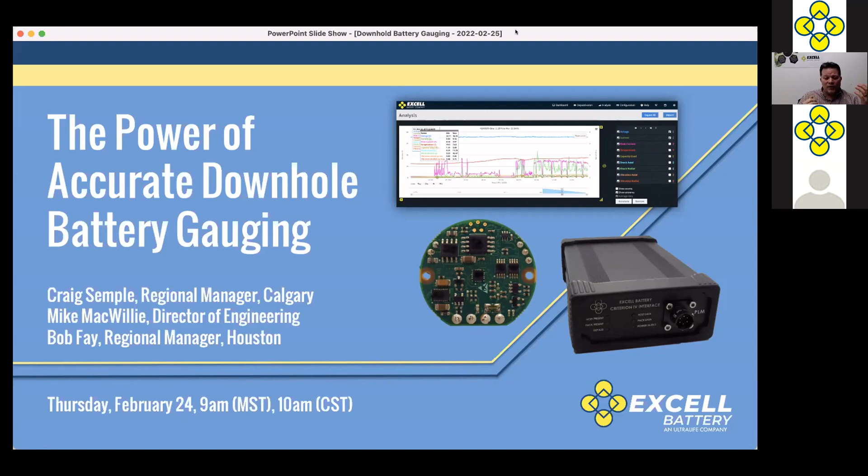Today, we'll take a look through Excell's Criterion gauging system. I will speak briefly on the history and advancements over the years, and Mike will take us through the technical specifications. Bob's going to do a nice demo of it all in action, and then we'll open up the floor to some of the Q&A that you guys have been posting throughout this conversation. So let's take a look at the next slide here.

So let's take a walk through the past, shall we? In the days of yore, when the world was young, it became ever apparent that there was a real need to answer what seemed a very simple question, really. What do I have left in my battery? Can I get another run? Well, this very simple question came with the reality that we were operating in, what you all know are some of the harshest environments out there.

Batteries would come back from the field with their badge of honor, the time-tested yellow and red paint marker scribbles on the side of the pack, 97 hours. And that paint was the capacity reporting of the day. So to take hold and wrestle this question to the ground, it was at this time that the Excell Group first introduced something we called our battery gauge, the BG. And the question was answered. It worked. It was simple to implement and operate, and life was good.

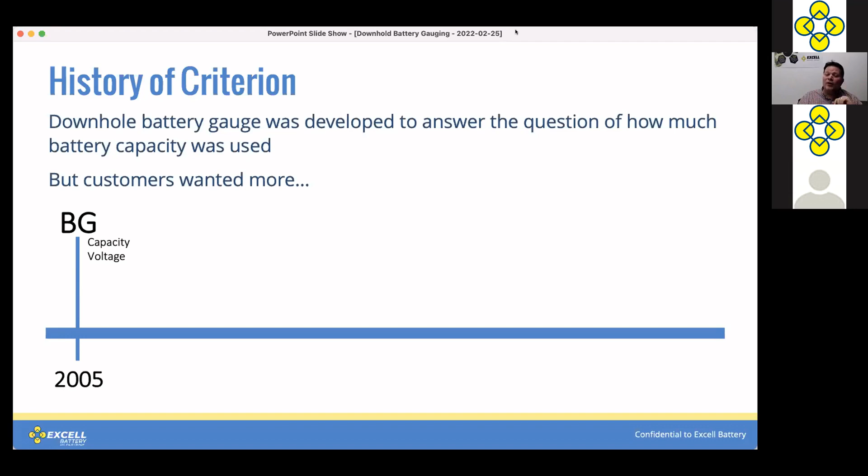A few years went by, and this wise person once said, if it ain't broke, it doesn't have enough features. And thus we undertook the design of the battery gauge 2. And not only did our engineers manage not to break it, they brought to you a whole suite of new features that the industry, that yourself were keen to have live within that battery: logging, shock, vibration, current, temperature, and a software interface to chart it all with.

It was great. But it was only a couple of years, suspiciously, around the time my friend Mike MacWillie came on board with Excell, that the thought came about that there were newer sensors, more powerful microcontrollers and memory that could withstand our harsh environments. We designed a new battery gauge, and this one was at a whole new level. With the need for your criteria to achieve this new bar for accuracy, the Criterion was born.

Accelerometers in all axes were implemented. The ability to communicate with the tool in real time was added. The software package was re-envisioned. The whole system was pretty special. On this platform, we have carried on to where we find ourselves today with the Criterion 4. Just a suite of features that were added in based on a lot of feedback and customer requirements.

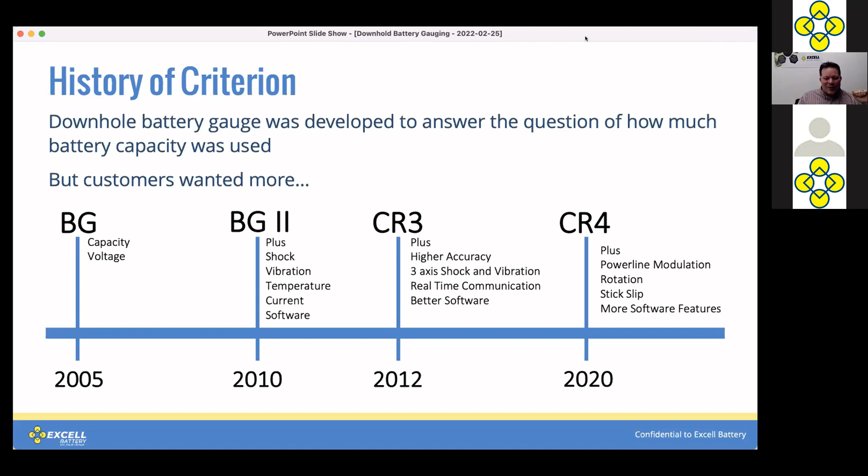Thanks, Craig. Hi, I'm Mike, Director of Engineering, and I'm just going to go through the technical specs fairly quickly. That there is a picture of the CR4 gauge, and it's able to sense, log, and record time of day with a real-time clock, voltage with the sensor. We have peak and average current, temperature, shock, vibration, rotation, and stick slip. And then from our time of day and current measurements, we calculate the capacity used.

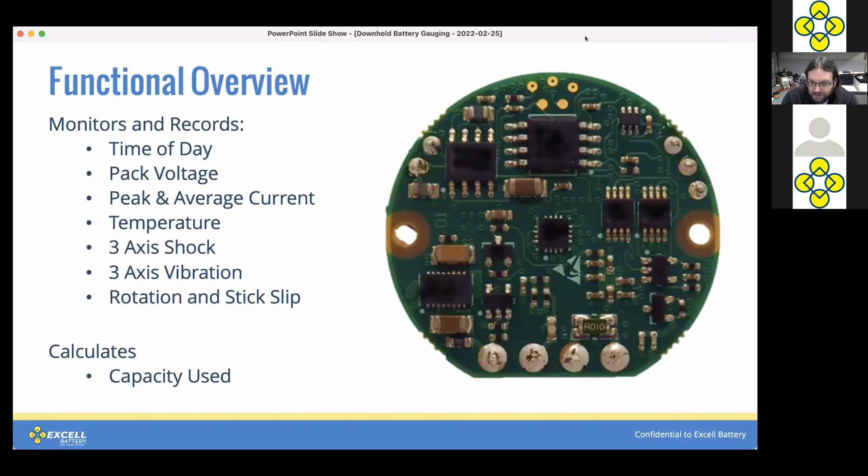The interface to the pack is fairly simple. The gauge sits between the cells and the output connector, and we have two communication interfaces. The CAN bus, which is the fastest, most robust interface, and then we have PLM if pins aren't available for CAN.

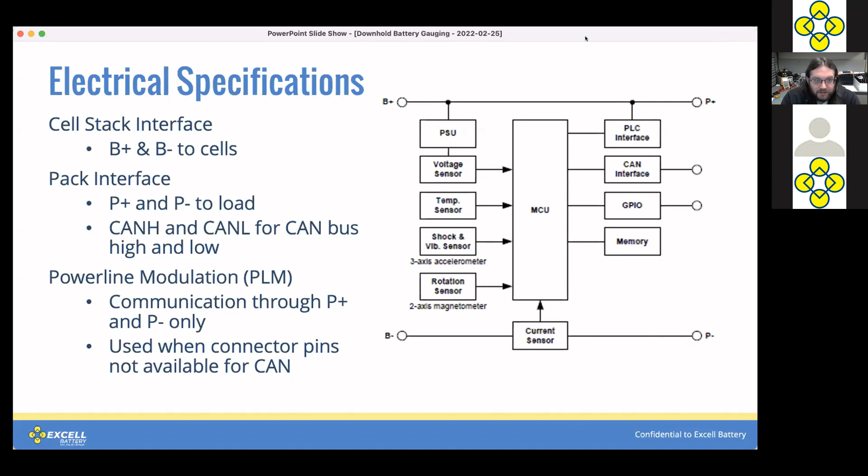Can we go to the next slide, please? Thanks. Power management. This has got a fair bit of effort to try and minimize the effect of the gauge on usable capacity of the battery.

There are really three states of interest. There's deep sleep, which is our lowest current state for extended storage. As an example, with a typical pack, max current draw is about 200 microamps, which means for a standard 29 amp hour pack, it would survive somewhere around 16 years.

Sleep is logging enabled, but the gauge is inactive. Max current draw 1 milliamp, and apart from log entries of went to sleep and woke up, there's nothing written to memory there. And then active. We transition from sleep to active based on current being drawn from the gauge. That threshold is configurable, but once that's exceeded, you're in the active state.

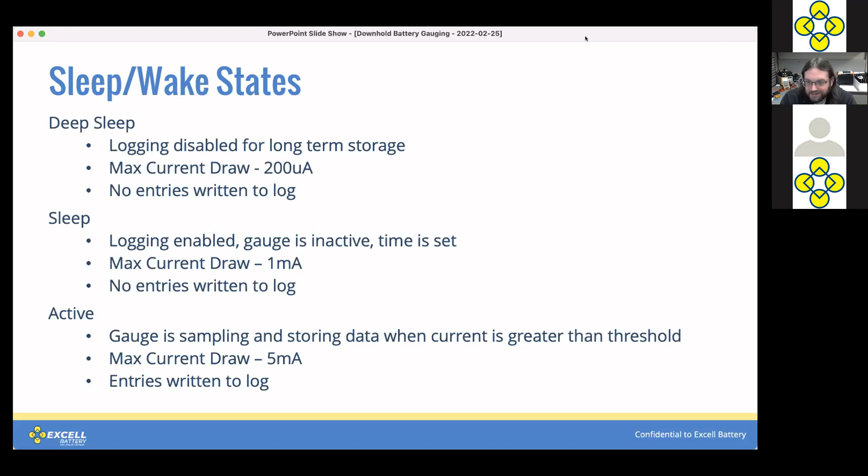Max current draw is 5 milliamps. It's typically a little bit lower than that, but that is with all sensors running and writing log data at the highest rate possible. And again, just effect on battery capacity. So deep sleep, 16 years, sleep 3.5. And in a typical 300-hour run, you're using at most 5% of battery capacity.

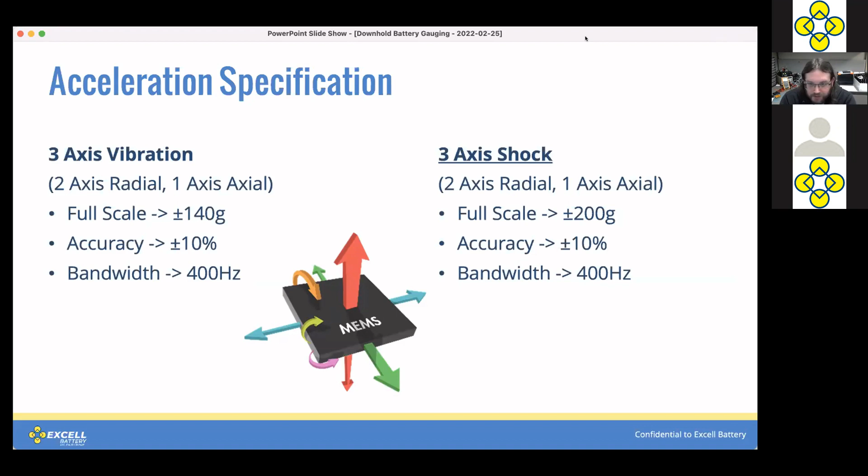Acceleration is done with a 3-axis accelerometer. Two of them, X and Y, are used for radial, one for axial, and full-scale resolution 200G, RMS 140 for vibration. Bandwidth up to 400 hertz on both, and plus or minus about 10%.

This is measured at a fairly high sample rate, 800 samples a second, and vibration, for radial, gets summed, filtered, and the max of the log rate is written to the log. For Z, it is just RMS filtered and the maximum during that log period written to memory.

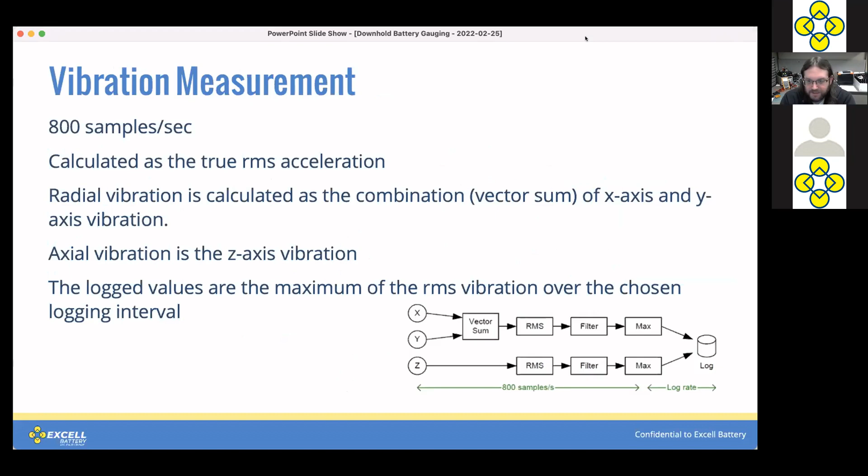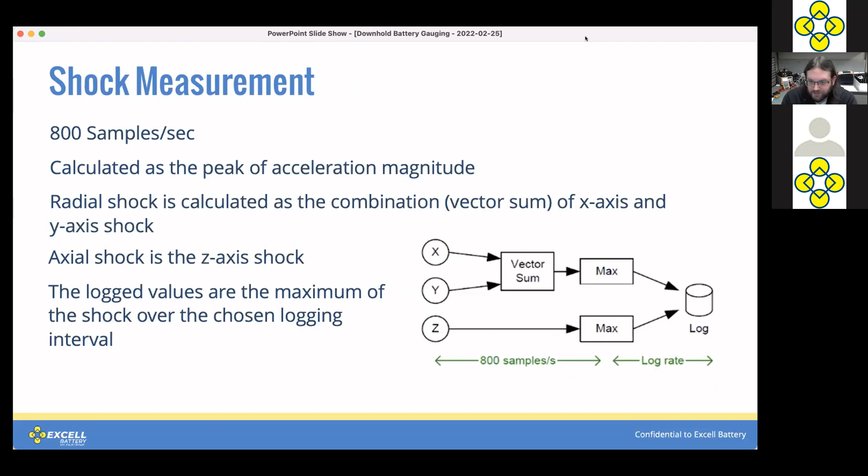Shock also uses the same accelerometer data, but gets a different filtering mechanism. So shock is really the peak in that period logged to memory. So at that 800 samples a second, the highest acceleration value recorded is the shock.

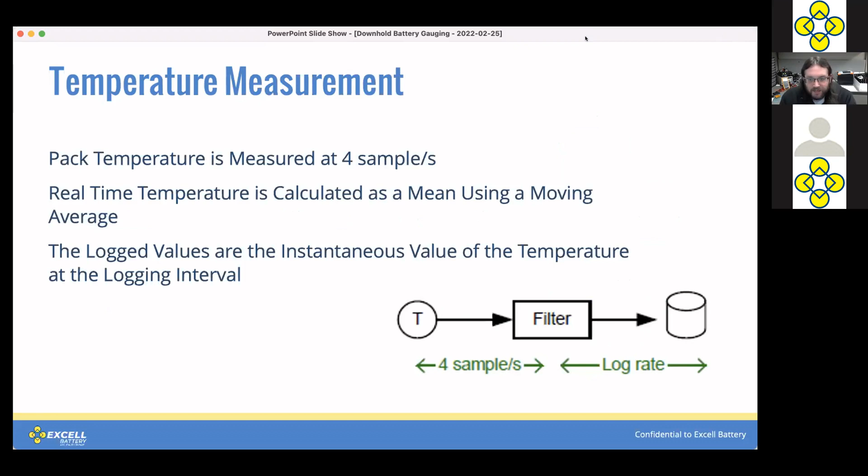Temperature. We have a temperature sensor on the board, and that is able to measure from -40 to 165, plus or minus about 2 degrees during the typical operating range. Temperature is measured a little more slowly, but still more than fast enough, 4 samples a second, and there's a moving average filter on that, which then gets logged to memory at the configured interval.

Voltage range, good for 5 to 65 volts, and we can measure 16 millivolts of resolution, plus or minus 1% accuracy. And again, 4 samples a second, it gets filtered with the same moving average filter as temperature and logged to memory at the rate we choose.

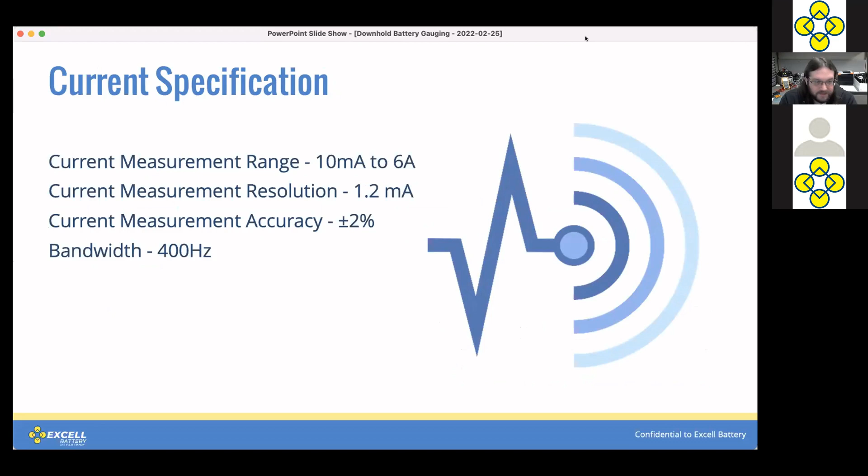Current, able to measure from 10 milliamps all the way up to 6 amps with 1.2 milliamp resolution, 2% accuracy, and that same 400 hertz bandwidth as the accelerometers. Current gets a little more signal processing. So that one measurement gets used to generate 3 data points.

The state of charge calculation, which is that 400 hertz measurement integrated over time. Then it gets averaged for the current that is logged just as current, and a peak detector of that period generates the peak current, which gets logged.

Rotation is done with a magnetometer, and we can measure anywhere from 3 all the way up to 500 RPM, plus or minus 5%. This is also sampled at quite a high rate, 1 kilohertz, and the rotation is filtered, integrated over time, and logged as RPM.

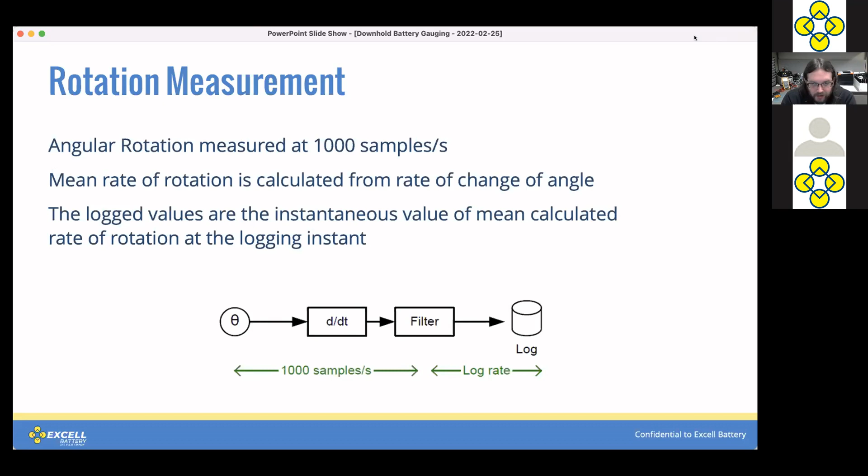Stick slip uses that same rotation data, and 3 paths on this one: min, max, average. And stick slip is the ratio of max minus min to average. So that's reported as a percentage. And finally, all of that gets stored in memory. We have 8 megs, which is good for about 4 million data points.

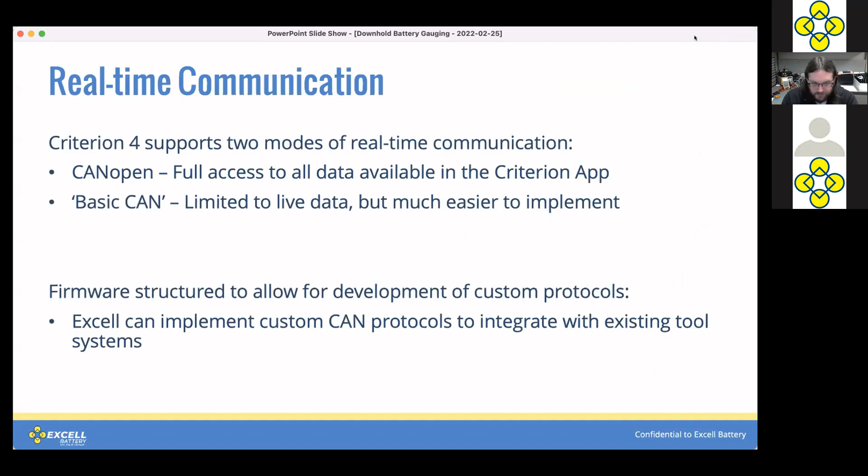Along with CR3, CR4 kind of expanded on the real-time communication options. We now have 2. There's CANopen, which is full access to everything that is available in the app. And then there's a simplified basic CAN protocol, which only gives you a subset of the live data, but it's really easy to implement. On top of that, our firmware is also structured in a way that lets us plug in custom protocols for whatever's needed.

Basic CAN, like I said, it's pretty simple. There are a total of 3 messages. They're sent out on fixed intervals. A GPIO pin on the gauge is used to switch between CANopen and basic CAN. So when most people use this, they just send it out a pin in the connector and tie it low in the harness when it's plugged into the tool.

IDs are configurable, so you can have up to 8 on the same CAN bus. You get 3 messages. Those 3 messages contain vibration, voltage, current, temperature, and capacity used on different intervals. But because the protocol is so simple, it doesn't support configuring the gauge or downloading of the log data. We do that in the app before integrating the battery into the tool.

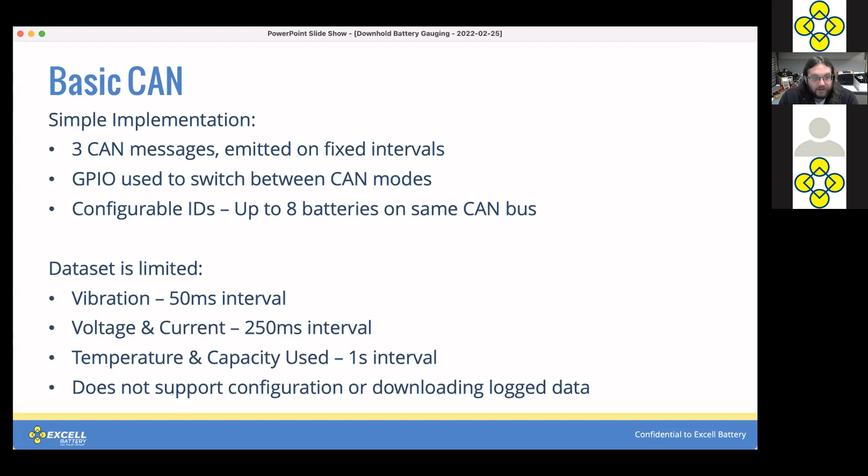And CANopen. CANopen is the same protocol that the app uses to communicate with the gauge. You have access to the full data set, everything including data download, configuration, real-time data, and all of the data on the dashboard of the app can be enabled as PDOs on demand. If that's something that interests you, just reach out and we can set you up with those details.

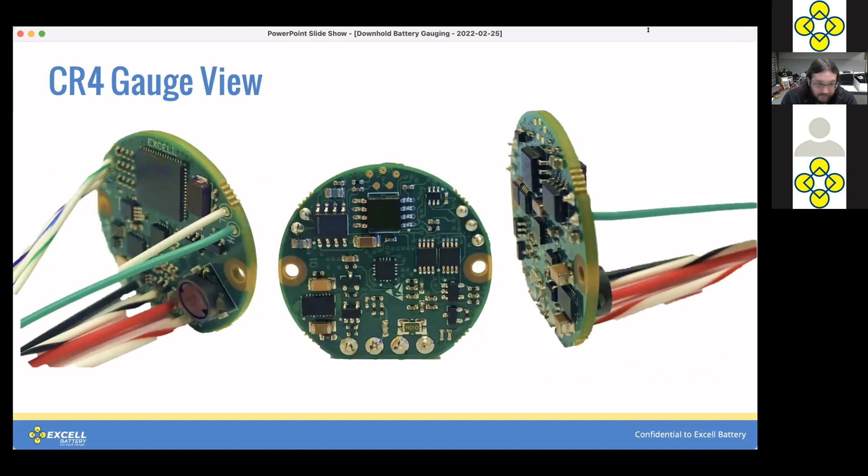Just a couple of pictures of the gauge. CR4 went back to a single board, which really makes it a whole lot more rugged, and there's just less to break. All of that is interfaced to the app using our interface unit, which we call the IFU for short. There's a USB to serial connection in there, and that handles both CAN and PLM. The app just switches between them automatically.

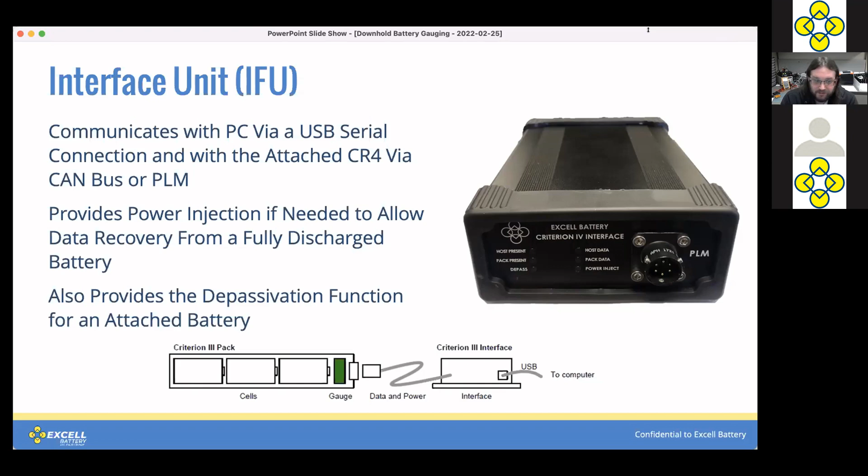Another feature that is quite useful in the IFU is power inject. If a battery is fully discharged, you can inject power from the IFU to the gauge, which lets you download the data regardless of how much energy is left in the battery. You also get depass, which pretty much everybody needs. And then I'm going to hand it over to Bob for the app overview and demo.

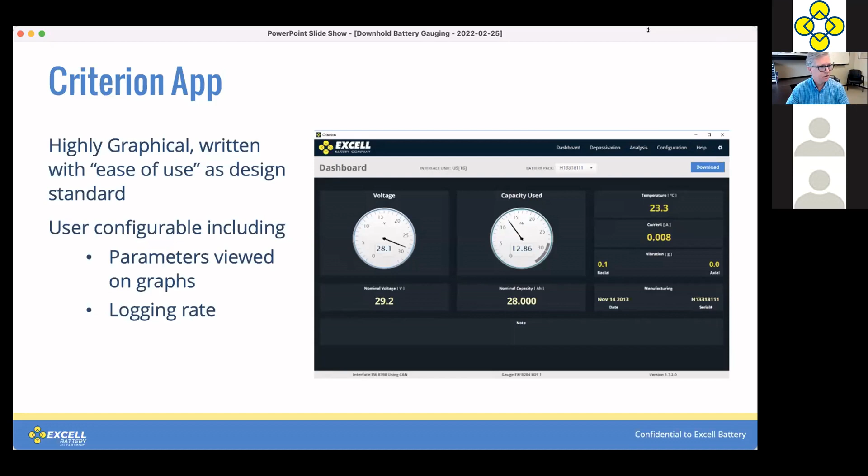Anyways, I just want to go over the Criterion app. As it says here, it's highly graphical, easy to use. That was our intention from the start, and I think we pretty much achieved that here. So I'm going to switch screens here to show a live view of the Criterion app. Hopefully I have it here, but anyways, the Criterion app is very graphical, easy to use.

As Mike mentioned, there's a depass feature in the app and the interface box. So if you click on the DPass button at the top, you're going to see parameters that are programmed in by default. But basically, you can start by clicking the start button, and you'll see a pop-up window showing the actual DPass. If you hover your mouse over the curves here, you'll see real-time voltage and current measurements. This is designed to time out if it reaches the cutoff voltage or the recovery voltage that you're looking for.

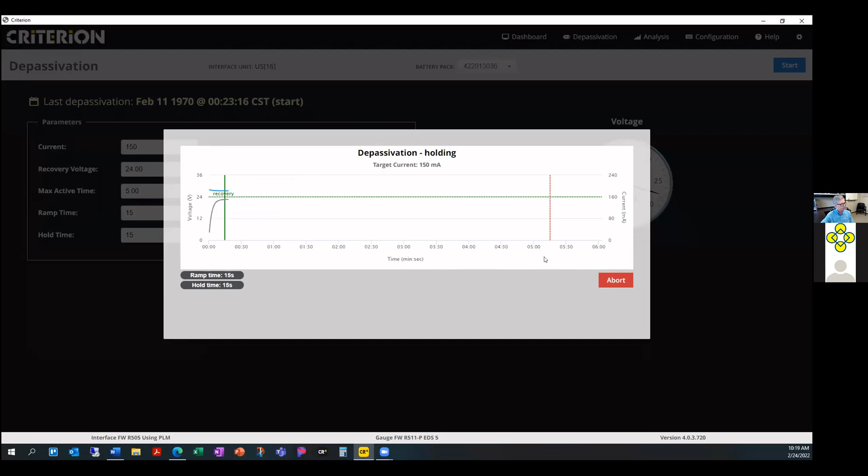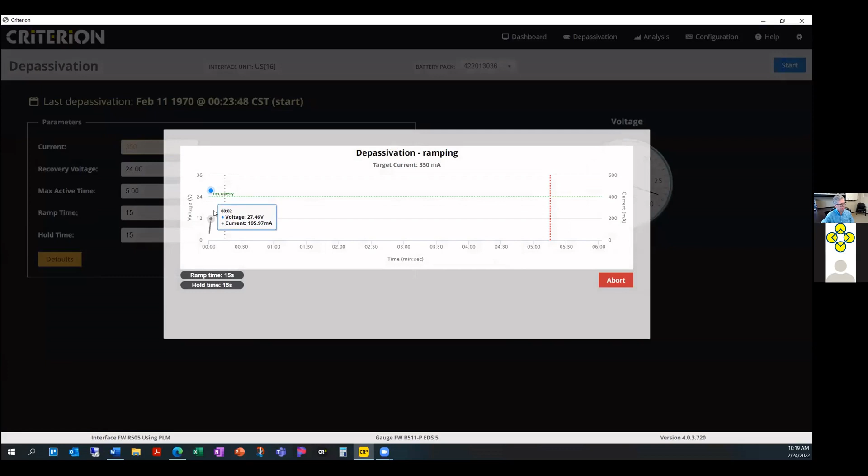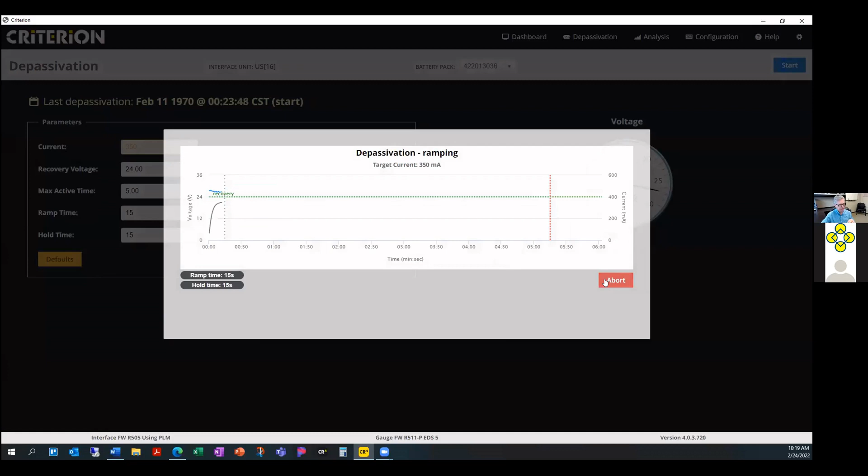You can also modify the depass parameters to whatever you want. If you want to make the current higher, just click there and then hit start, and you'll see the current will climb up to 350 milliamps, just like I put in there. There is a ramp up time, as it says, but this is customizable to how you want to DPass the battery.

Let's go over to the configuration screen, and this is what you have to do when you receive the battery. You have to set up the battery to use in your tool. So you're going to see a screen like this once you go to configuration, and there's basically three things you have to do once you receive it. One, you have to set the clock. The battery is going to come to you set to Unix epoch time, which is like 1969 or 1970. So you want to set the time by clicking on that button. It'll bring the time to the current time that matches your computer time.

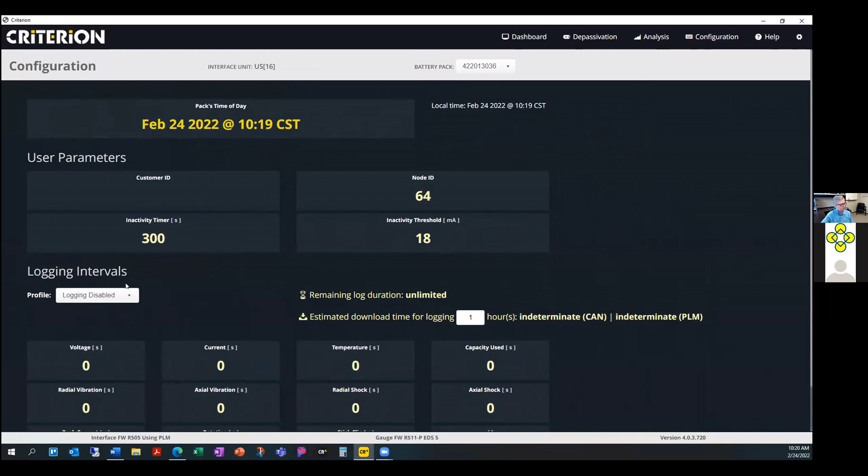And then you have to set the logging interval by clicking one of the menu items here that will populate the measurements, as you see here. So if you click on typical, you're going to see all these numbers here, but this is telling you how often the gauge will write to memory. So voltage will write to memory every 5 seconds, current 5 seconds, and so on. You can actually change any one of these to whatever you want.

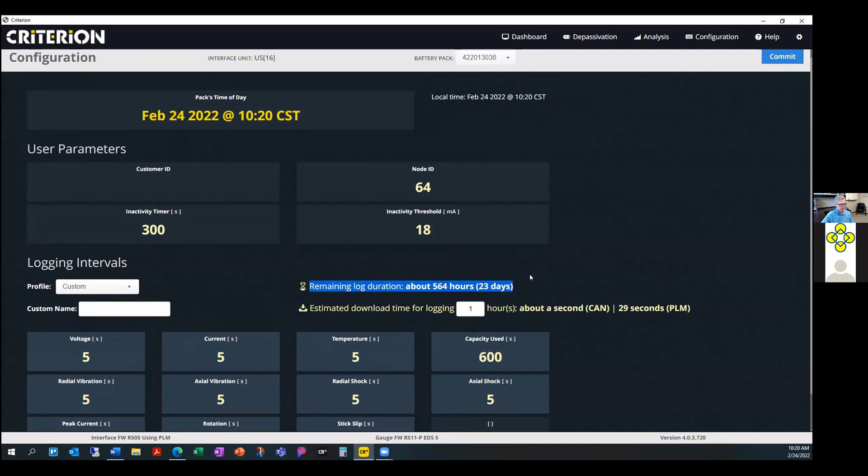And then you could save that for the configuration for your battery. I want to point out this remaining log duration, which means how long the memory will last with this configuration. Right now I have it set up so the gauge memory will last 564 hours. You can see how changing any one of these will affect that number. Now it's 403 hours after changing the recording interval to 1 second.

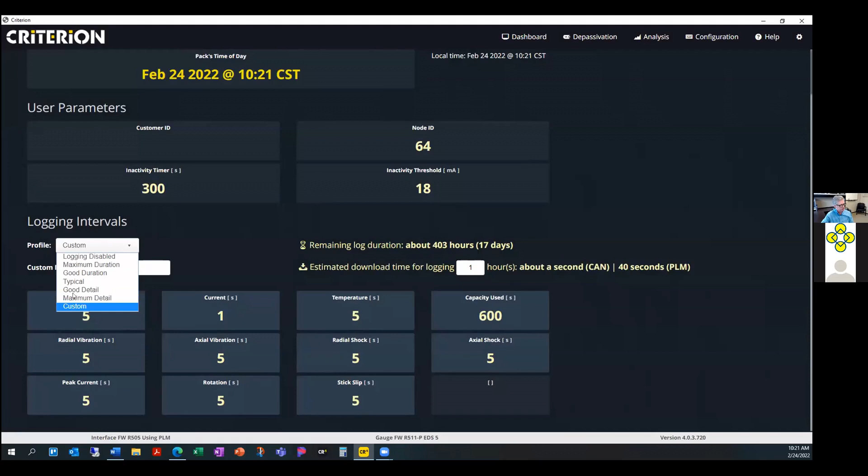We have these suggested intervals. You can also do a custom one, but these can be set up to work for your battery and your job, however you want it.

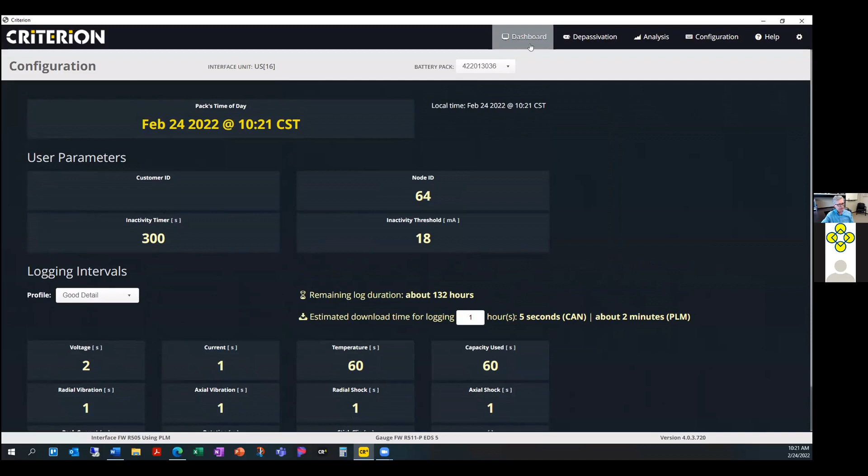Once you set up the log interval, you have to hit commit. Now the battery is committed to that log interval when it's used downhole. After you do this, you can disconnect the battery, put it into your tool, and run it downhole. Then when you bring it back, you hook it back up, go to the dashboard, and you're going to see a download screen like this.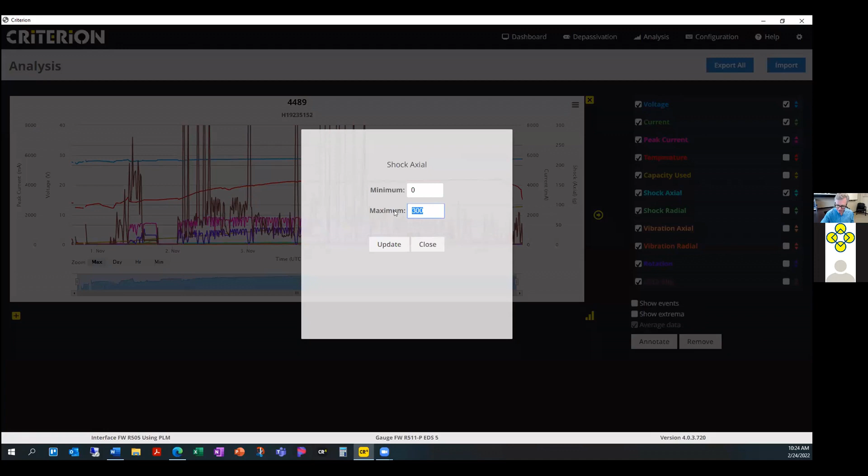There's a feature where you could change the scaling. Because of all these different measurements on the screen, it's kind of hard to show all the data at the scaling you probably want. So if we want to make this shock axial more pronounced, we can go over here and change the scaling, so hopefully that shock will show up a little bit more — maybe have to do more than that. If I do that, you're going to see the blue line come up a little bit higher so you could actually see it better than before.

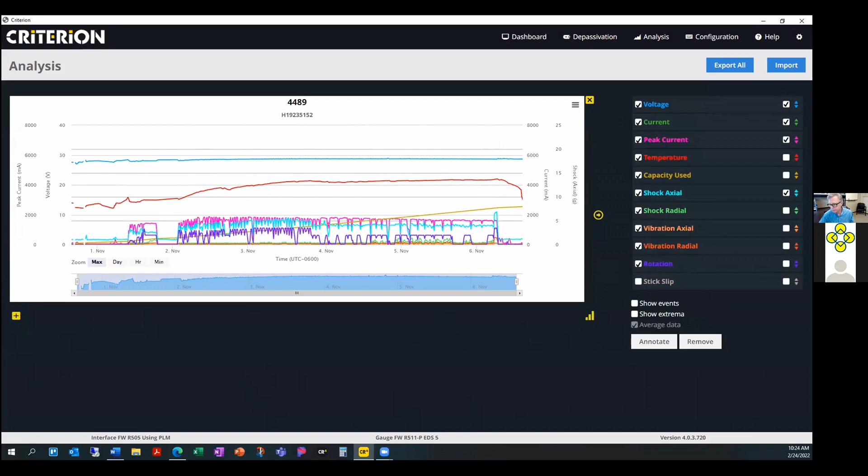I want to point out some of our newer features, like Mike mentioned, we have rotation and stick slip. Rotation is now — you select some of these, but the rotation is the purple number, the purple graph right there, and it's showing 40 RPM. You can see where the rotation stopped and started by the way that curve goes up and down.

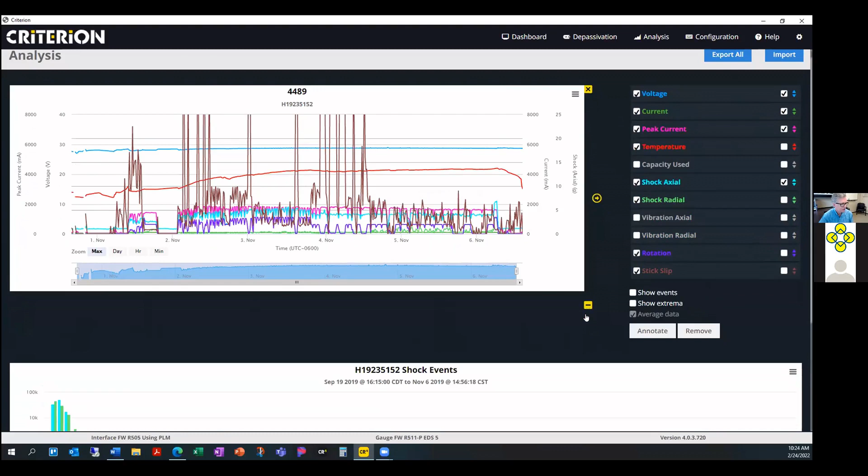We have a histogram feature where if you click on this histogram symbol at the bottom, a window will pop up like this, showing the different shock levels grouped by buckets. Right now I'm showing 124 shocks at 35G, and this shows 2 shocks at 65G. So this is a good way to get a pictorial view of how much shock the battery went through.

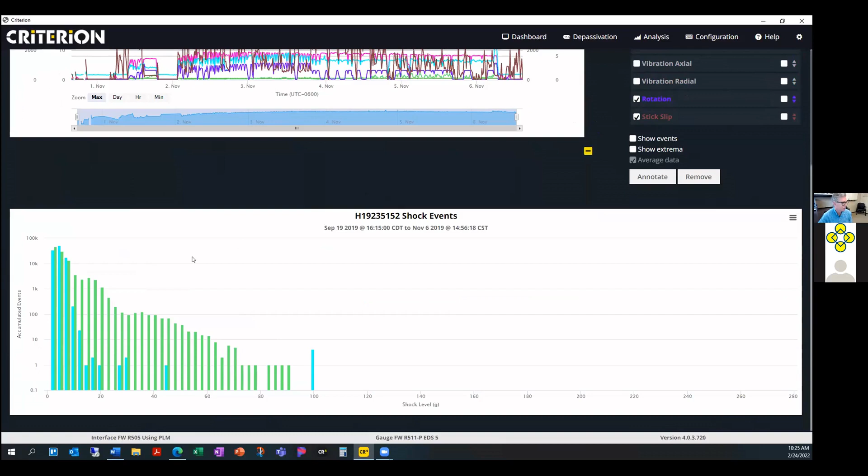Over here, this little hamburger symbol - if you click on that, you're going to see different ways to download images. You could download PNG, SVG, or a PDF document. Also, you could download a CSV file if you really want to look at the raw data behind that.

If I close the file, there's ways to export it. You can export it by clicking this save file icon on the right, and it'll have a pop-up where you can save the file to your hard drive. You can also import files. So say you download the file into your computer and want to give it to someone else - you can export the file, and then import it by clicking that button and loading it from your computer hard drive.

Let me open that file back up. I forgot to show one feature - we have an annotation feature where if you click this, you can type in whatever you want to call it, like 'average shock.' And then click anywhere you want to annotate that, and it will now show up on your PDF export. If you want to label things, you can do it wherever you want, like that.

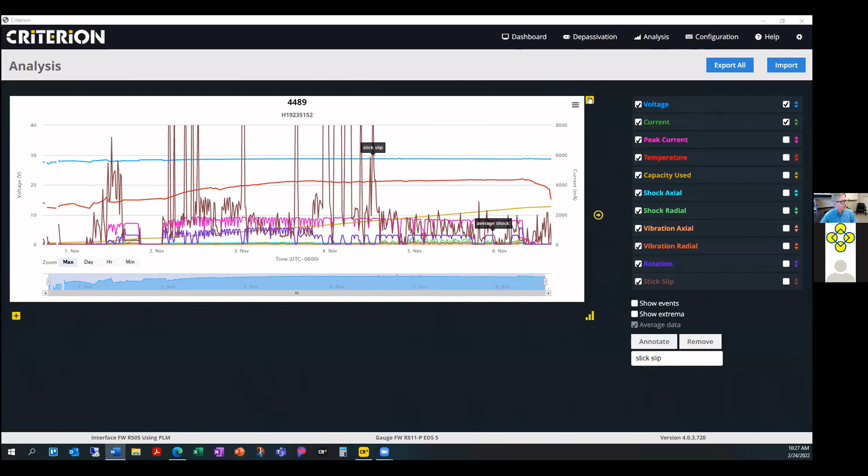So I think I pretty much went over most of the features of the app and the graph, and I'll take you back to the presentation we had.

Here it is. We do have a new version coming out. We're calling it version 4.2. This should be out very shortly. Some of the features I just want to go over real quick.

One, we have a new dashboard layout, which is going to show active time - how many minutes, hours, or days the battery actually discharged. It's not necessarily the same as capacity use. Capacity use tells you amp hours, but a lot of people want to know how many hours the battery discharged. So this will help give you that tool to understand how many hours, days, or minutes the battery was actually discharging.

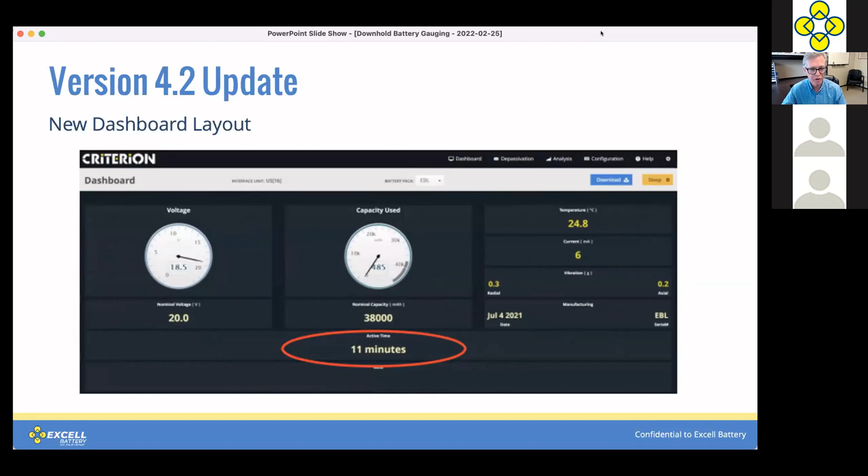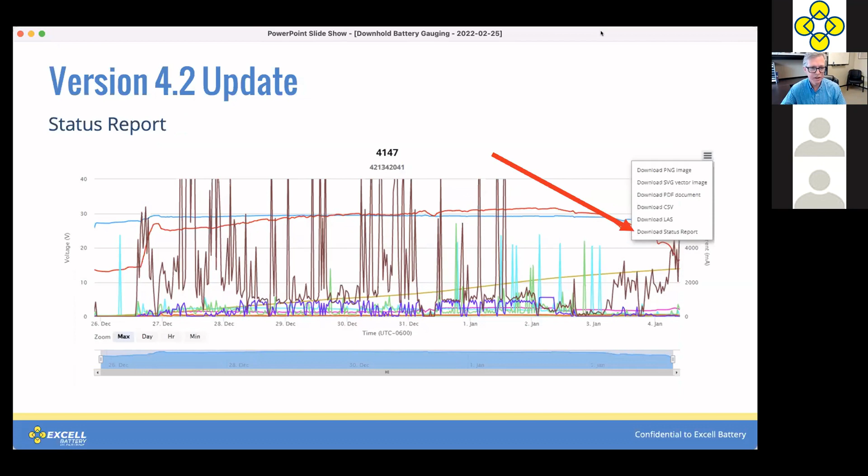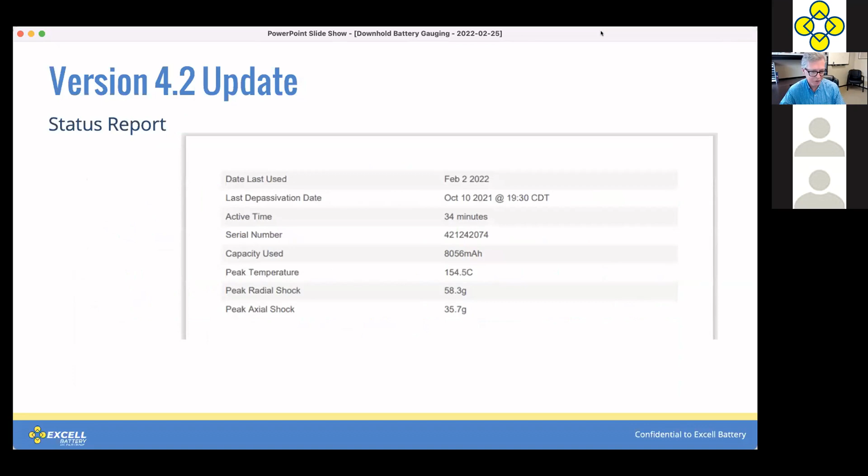Status report - in the download menu that we were showing you earlier, you could download a status report, which is showing up in the next screen here. That will give you some key information about the battery, such as active time, serial number, peak temperature, peak radial, and peak axial shocks.

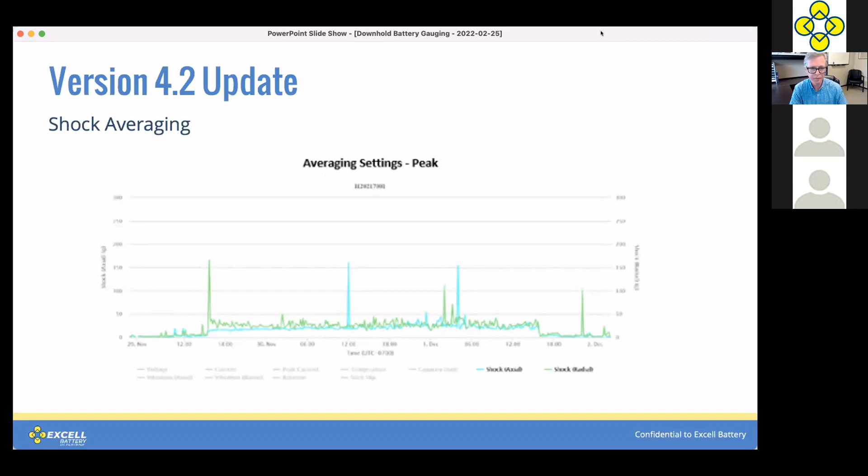Shock averaging - sorry for the low resolution on the graphics here, but in our current version, the shock averaging is probably not as descriptive as we would like it to be. The next slide shows how we're changing that - you will actually be able to see the peaks of the shock that occur while you're using a downhole.

We also have a menu button optimized for smaller screens. We're increasing the histogram range up to 200G, and we have a LAS file export feature, if that's something you want to look at.

Just a real quick thing about the Excell Battery before we go to the questions - we've been a leading OEM supplier of smart batteries for over 35 years. We do a lot of work in oil and gas, and our specialty is demanding very high temperature requirements for your batteries.

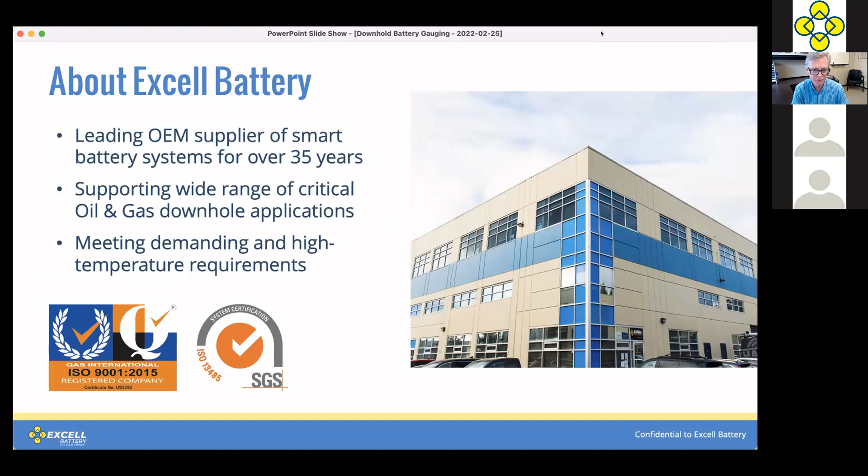I'm going to turn this over to Mike - what are some of the options that we can connect the gauge to the battery cell mechanically? Are we doing it via soldering or connectors? Mike, do you want to try to answer that?

Yeah, sure. We most often do that by soldering wires to the tabs that are welded. The gauge itself gets installed mechanically in the end cap of the battery assembly, and then wired between the output connector and the cell stack.

How many wires are needed for both the CAN version and the PLM version of the gauge? Coming out of the pack, the CAN version needs at least 4, 5 if you want to do the basic CAN, since we need that 5th wire for the GPIO. PLM just needs the positive and negative.

Can you explain in more detail what stick slip percentages represent? They're really intended to give you some insight into events that cause a lot of damage to the battery. The percentages are the difference between a peak rotation and the average. So if during that logging interval your average rotation is 10 RPM, but there's a period where it stops and then unwinds, that will show itself as a very high stick slip, and that high stick slip event is likely to have caused some damage.